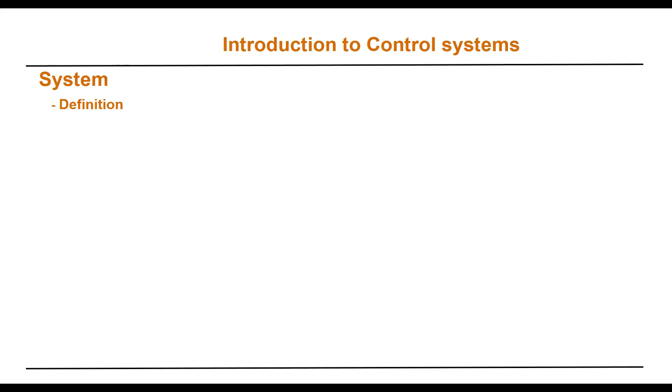Today we'll be continuing talking about the introduction for the control system, but let's start by defining what is a system. So any help? What is a system? Any suggestion? Input-output process. Input-output process. Well, a system is an interconnection of components, forming a system configuration that will provide a desired system response.

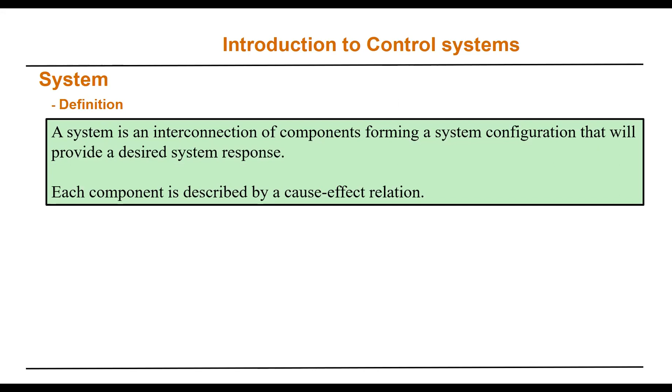Each component can be described by cause and effect. Basically, we can model the system by a black box. I have input to the black box and I get an output. The input to the black box, basically, is what I want, my desired output. The output will be the actual one.

And in here, this is the black box. This black box could be a differential equation, could be a transfer function, could be a state space representation. So basically, I am representing the system by an input-output relationship. Okay, cause and effect. Any question here?

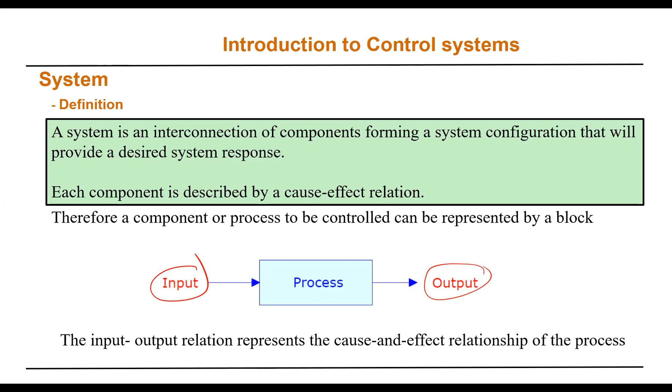Well, let's talk about an open loop system. What's an open loop system? There is no feedback. One way. Okay, basically in the open loop system, I have a process and I have desired outputs. I hope my actual output will be equal to the desired output.

But sometimes it doesn't match. In that case, I cannot do anything. I cannot do any correction. I hope my system will work perfectly, but if it doesn't, then it doesn't. Can you give me from real life any example for an open loop system? Toaster. The op-amp. In the op-amp, well, the op-amp will give you a gain, but sometimes the op-amp has a built-in feedback, you can have a built-in feedback.

Maybe in a communication system, when you receive a modulated message, and then you want the output. In the simple communication system, there is no feedback here. You just receive the modulated message, then you demodulate the message, and then you extract the output.

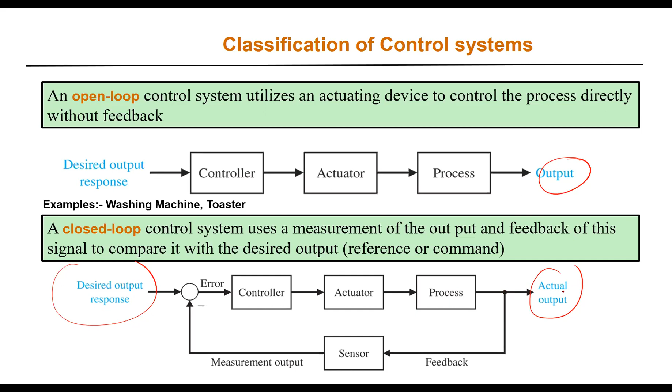If there is a difference between the actual and the desired, then the compressor will start working, and you will have more cooling in the system. If you reach the desired one, there is no error. The controller or the compressor will stop working. So in here, what you need: sensor, and comparator.

So generally speaking, we will be using feedback system. It doesn't mean that we don't use open loop system. We do use open loop system. What's the advantage of open loop system over the feedback system? Any advantage? Simpler. Simpler. What else? Cheaper. You don't need to have a sensor, but sometimes it's not accurate. So most of the time, we will be working with the closed loop system.

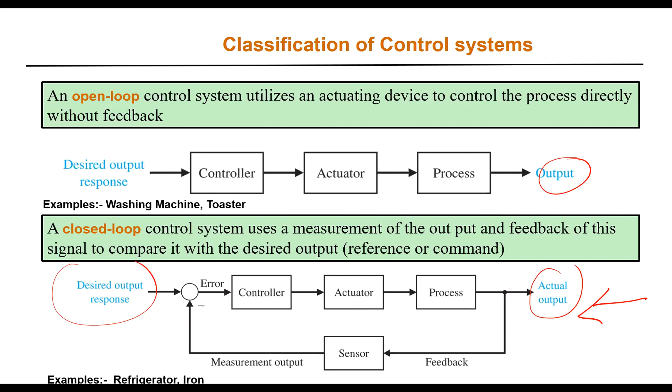You are putting an antenna in the roof. What do you want to do in the antenna? You want to position the antenna through the motor in certain direction. And suppose there is a wind in the roof. The wind tries to put a torque such that it will try to reposition your antenna. But if you have good control system and the disturbance, of course, with a reasonable power, your system tries to adjust such that the effect of the disturbance will be minimal.

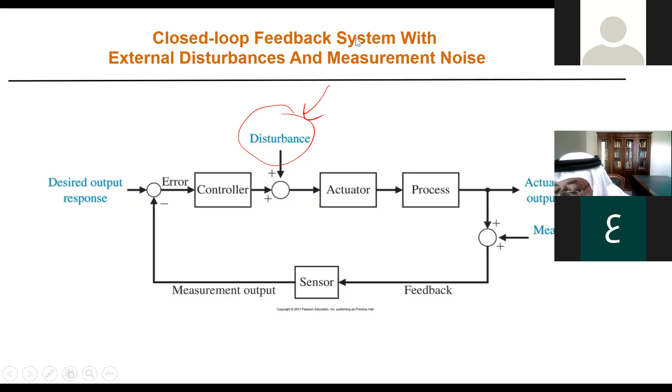Okay. Well, where this is, this is a disturbance.

Okay, the actuator, as I said, if you have water tank, the valve is the actuator. The controller is the motor. The motor will drive the actuator, okay? But most of the time, we will put the controller and the actuator together. But technically speaking, your question is absolutely correct. The actuator is either a mechanical system, which is the valve, or could be an electrical system. The controller is what it will do to the actuator. It will make the actuator be on and off, or rotate in certain direction.

So the actuator could be mechanical, and I gave you the example of the valve in a water tank. The controller, Doctor? The controller is the motor. The motor, I see now. Okay. Yes. Well, you could have. Yeah.

Doctor, a disturbance, does it have to always happen between the controller and the actuator, or can it happen in any part of the process? It could, a disturbance could be anywhere in the system. We are modeling it in this way. We are modeling the disturbance as another input in the system, we are positioning it in here. But disturbance is, you know, modeling of another input.

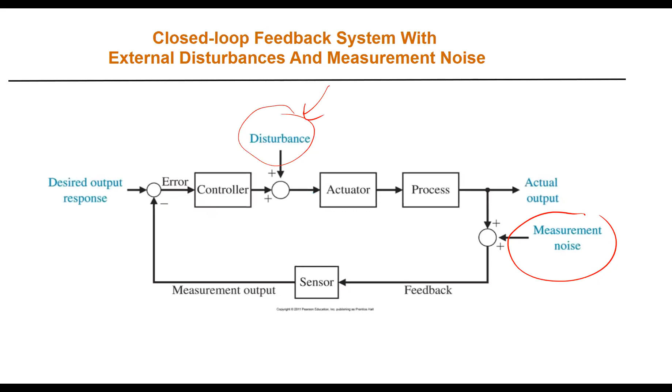Now in here, well, this is a loop. I could have more than one loop. I have an inner loop and outer loop, and each one has its function. Now in this system, tell me how many inputs I have and how many outputs. One input, one output. We can say main input, yeah.

What do I mean by input? I mean, Doctor, main input. Yeah, well, it is one input. The other one, this is inside. No, the external input, the input which will drive the system. This is an input. The internal one, this is not an input. Unless, for example, in the case of the previous one, you could think about the disturbance as another input. So if this is the case, I will call my system single input, single output. Okay.

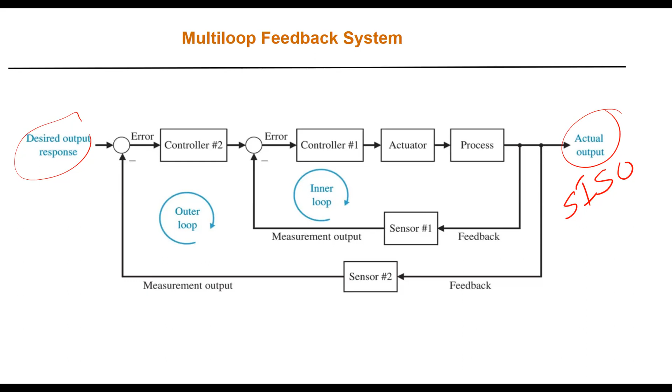This is the opposite of multi-input, multi-output, right? We could have a multi-input, multi-output system. Can you give me an example of multi-input, multi-output?

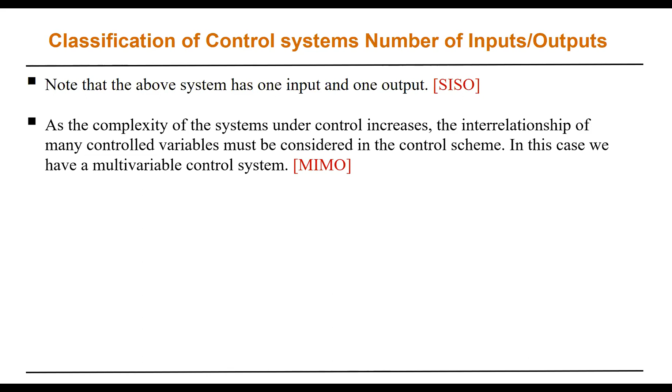But a simpler one, look at this one. How many inputs I have? 2 sources, yes, I have 2 sources. And you have outputs at each passive and active component. Yes, now the output, you define it. One output, let's say IL in here, or 2 outputs, this is VC2, and this is VC1. So in this case, I have 3 outputs and 2 inputs. This is what I mean by multi-input, multi-output.

Okay? Doctor, could you repeat the output and input in this example? Well, in this example, I have VS as input, a voltage source, and let's say IS, a current source. So I have 2 sources. Now, the output depends on what I want. I can define IL as an output, VC2 as an output, VC1 as an output. In this case, I have 3 outputs and 2 inputs. Or suppose I'm interested only in IL.

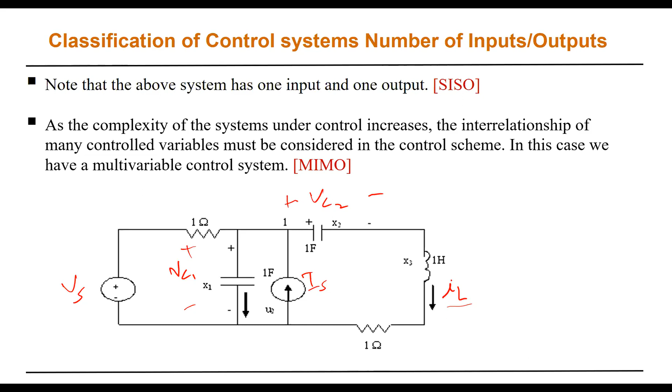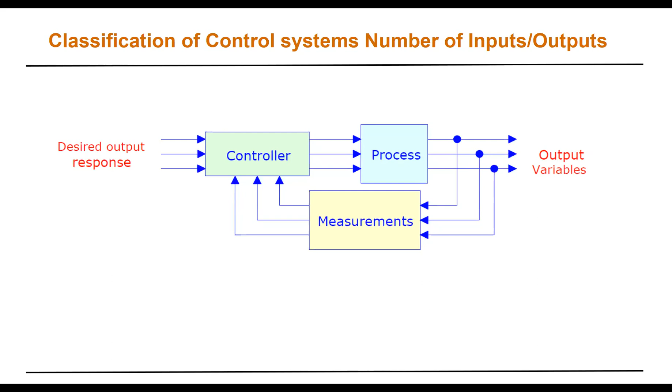Now, in general, this is the way we put them. I have a controller, and I have many inputs, measurement devices, outputs. So this is the way we view the multi-input, multi-output system.

Well, when the control system started: very early, in the ancient years, people used control systems. If you think about the pyramids, how the Egyptians built the pyramids, how did they put the huge rocks up? But theoretically speaking, or as a process, it started in 1769 with Watt's invention of the steam engine.

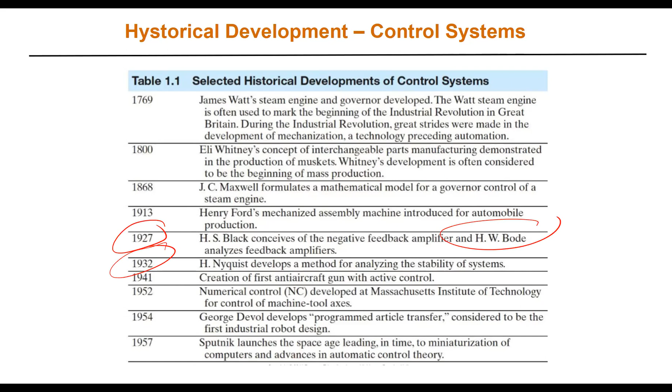Then they started systematically in the process. And then, as we move on, they started developing many things. We are still using some of the things from 1927, like Bode, and 1932, Nyquist. As a matter of fact, in this course we will be checking the stability of the system by using the Nyquist method, or we will do the Bode plot diagram based on Bode's work. Of course, as we move, things develop.

And now, these days, what is different from the old time? For example, in the 70s I studied the course; more or less the material is the same, but what's different is the computer component. For example, now we are using MATLAB. You can program the entire course through MATLAB. So the computer part is changing.

You can analyze, you can design more complicated, more complex systems than what people used to do, because the mathematical power or the computing power was very minimal. Now with the computer, with the supercomputer, we could do a lot.

Yes. I don't want to interrupt the flow, but a question comes to my mind about Nyquist, because we studied Nyquist back in 370, where we use the Nyquist criteria for sampling. The sampling frequency has to be double the frequency of the signal so that we will not miss any information, right? Yes. So is that related to the Nyquist? No.

There, the Nyquist rate is a little bit different from what we will be studying here. Here we will be studying: if I have the transfer function of a system, how can you know it's stable? Suppose I have this closed loop system. Okay, this is the transfer function, let's say. You are giving me the transfer function of the open loop system, and I would like to study the stability of the closed loop system by the Nyquist criteria.

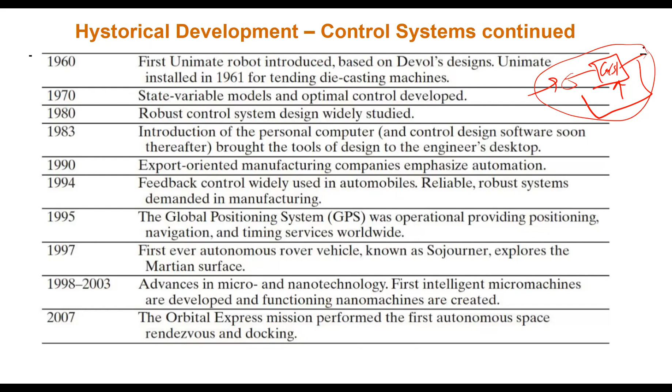No, it's a little bit different. There you are talking about the Nyquist rate. Yes, the sampling. No, here it's a little bit different. I see. Okay.

Well, let's come back to the modeling. This is an open loop system. What is my desired output here? The water level in the tank, which is basically h, the height. Yes. Okay, so the height is my desired output. At home we are using the water through V1. How do I check if I am having the desired level or not? And V2 is set, let's say, at a certain level.

How do I check if I'm having the desired level? What do we do? We put a sensor on H. No, wait. If you put a sensor, now you make it a closed loop. Now I'm talking about open loop. You are absolutely right, but you are jumping to the closed loop. But here, how do we check?

Well, every once in a while, we go and check the level. Or if you don't check, all of a sudden you'll discover you don't have water at home. Yes, you have to do it manually. So basically, every once in a while, you send somebody to check the water level. But here the accuracy is not going to be that much. If the water level is not what you want, definitely there is no precision, because you are looking at it. You don't know whether it's actually reached.

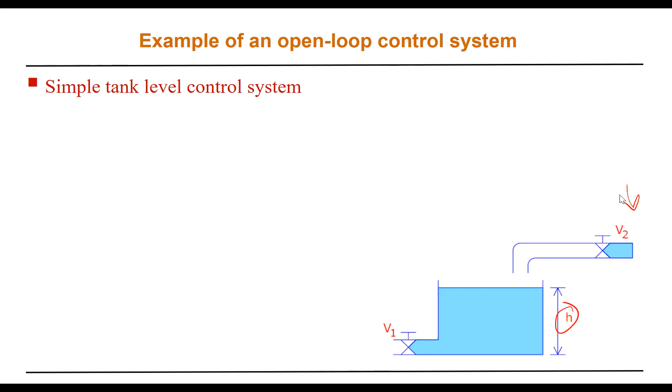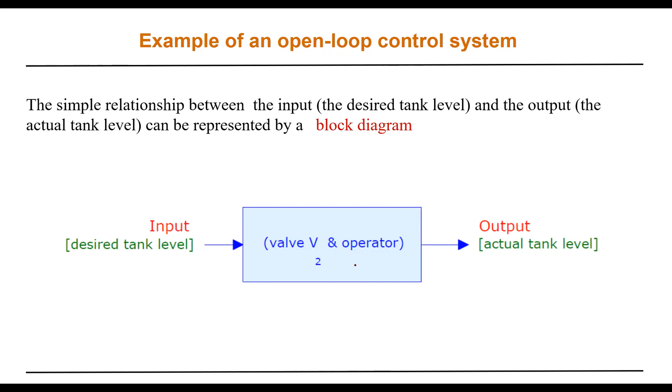So in this case, I can think about it as an open loop system, and I can model it as the following block diagram: the desired level through V2, and the operator, the person who will see, can adjust the opening of V2, and then you get the output. But as I said, in this case your system is not very accurate. If you want to make it automatic, definitely you would put a sensor.

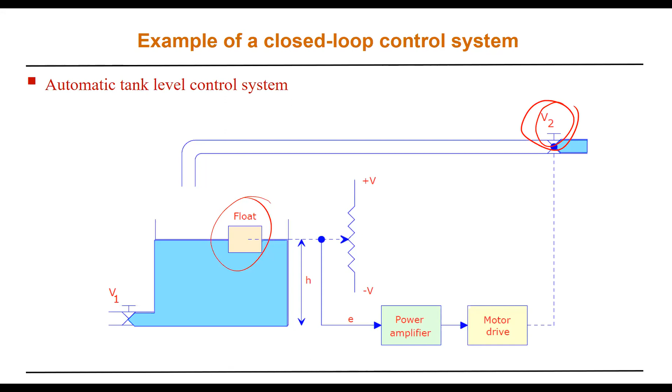Unless, of course, sometimes maintenance you have to do - sometimes the float is not working, or the sensor in the motor is not working. But generally speaking, this is basically a feedback system where I can model it this way: the desired input, the actual output, I compare the actual with the desired, then through the controller I will adjust my system. This is basically what everybody is doing at home - you have the float and the motor, and it will operate automatically.

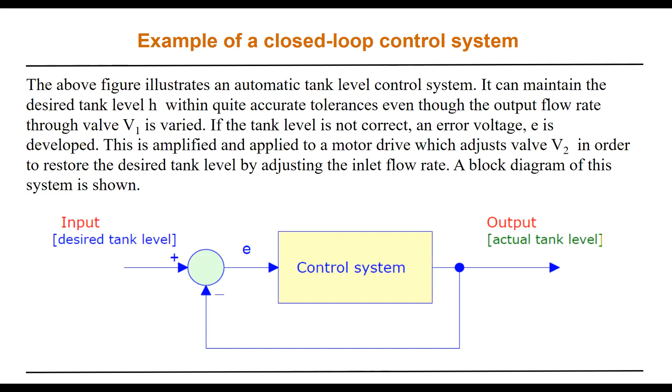Let's take another example - the steering control system. What do you want to do here? What is your desired output? Go straight - this is your desired direction, let's say. But suppose all of a sudden you have a car in front of you. What do you do? You have to brake, or if you have several lanes, you will do correction through steering, exactly.

This gives the idea of autonomous cars - yes, this is what they are going to do, the autonomous cars. I think it's full of control systems, right? Yes, but it doesn't stop - the car will not stop, because look, what's going to come will definitely be a very complicated system, but that's what they are going to do, and I think they started already.

But suppose you are driving a car, not necessarily with a car in front of you - you are on a road where there is a curve. What do you do? Do you leave the steering wheel as is, or try to bend it? You try to change, because if there is a curve in the road, you are on the highway and you want to take an exit - what do you do? You have to turn the wheel. So I'll basically show you - you have to make a signal, which most people do not do.

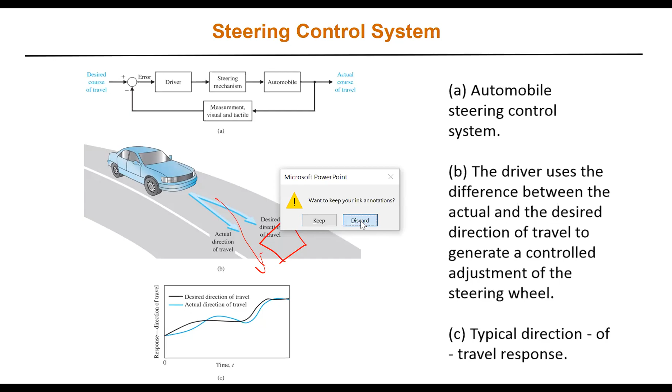No, the steering wheel will be in that case the actuator. The driver is the controller. And how do you change it? How do you change the direction? You need mechanical.

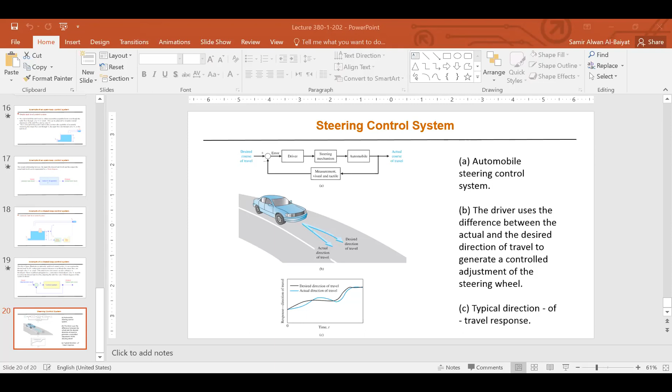Okay, it's good. Now, guys, it's very interesting and honestly this is great. But also I realize, in the online, I am a little bit slower.

Okay, so we have to move a little bit. Now, what we want to do now is basically what we are going to study: the mathematical model of systems. So in the rest of this lecture and next lecture, we will be talking about mathematical models. In order for me to do certain things, certain calculations, I need the mathematical model. The mathematical model could be a differential equation for the system, and we will be studying mechanical systems as well as electrical systems. We will talk about the transfer function of a system, and then we'll talk about MATLAB.

How many of you are familiar with MATLAB? Well, I hope all of you are, but if you are not, I think in the first experiment you will start learning the MATLAB commands. As we move through the semester, I will give some commands and give you homework, usually containing problems that use MATLAB. In the project, inshallah, you'll definitely be using MATLAB heavily.

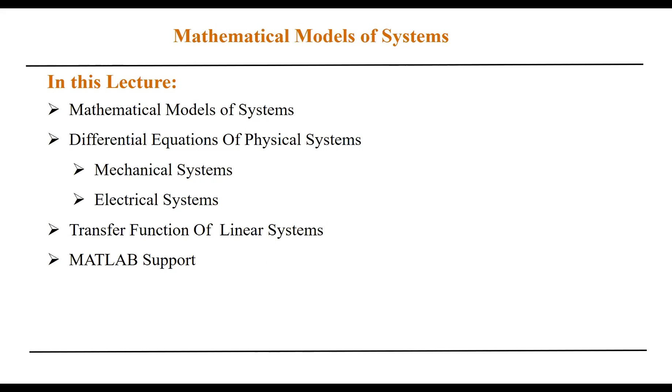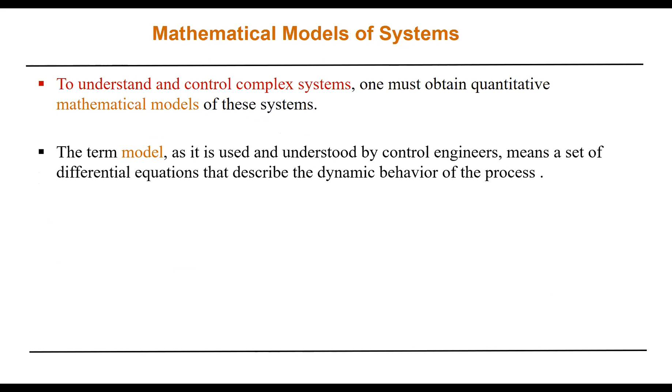So let me start with the mathematical model. What's the model? Okay, if I want to obtain a quantitative description for the system, I must have a certain mathematical model. So the mathematical model usually is a differential equation. It could be our starting point most of the time. It will give you the behavior of the system and how you build this system.

Well, usually if you have a physical system, you will use physical laws. So if you are talking about a circuit, if you are talking about electrical engineering, what do we use? What are the laws we use in describing, let's say, a circuit? What do we use? Ohm's law, we use KVL and KCL. Ohm's law is part of, within, KVL and KCL. How about if I have a mechanical system? Newton's law. Newton's law, okay.

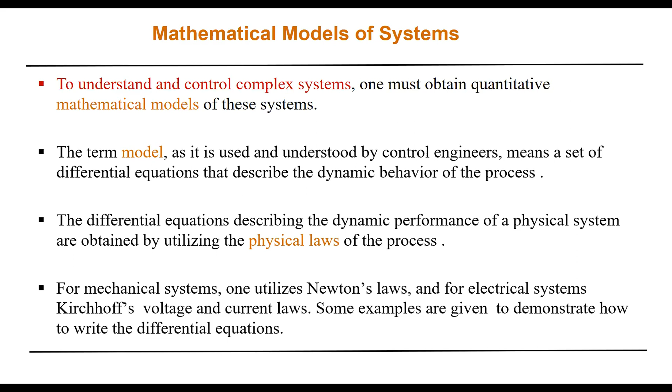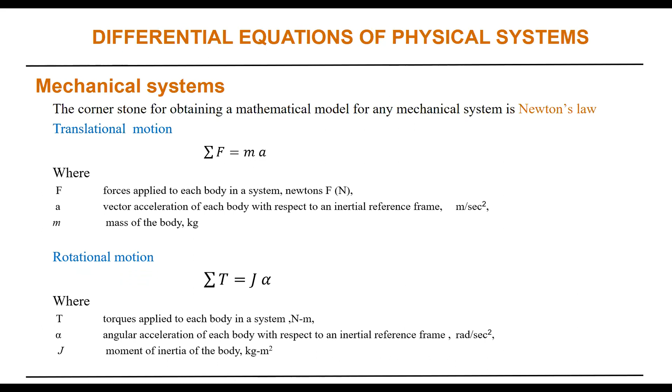So basically, if you have a physical system, we are going to start with some simple physical systems, and then we will be using both Newton's law and, as I said, KVL and KCL. Now, suppose I have a mechanical system. What's Newton's law? Basically, if you have a system, the summation of the forces must be equal to mass times the acceleration. So if you have a free body diagram, you will look into the forces acting on the system, and the summation of those forces must equal the mass times acceleration. So basically, when you put a force, you are moving the system. This is in linear motion. What will happen if I have rotational motion? Torque. So in rotational motion, the summation of the torques must be equal to the moment of inertia times the angular acceleration.

Go to the car. Where is this in the car? Suspension system. Exactly, the suspension system. Where do you sit? You want to sit comfortably in the car.

So you are sitting down on a spring. There's a spring and also a shock absorber. If you are moving on a straight smooth road, you feel comfortable. But if there's a bump in the road, the shock absorber and the spring will absorb this shock, and you don't feel that much.

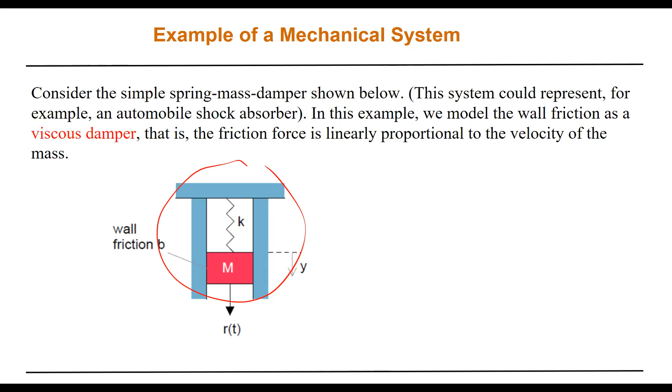Newton's law, right? The mass, the force, balance. Suppose I have the mass, free body diagram. This is the mass. What are the forces acting on it?

We have the source force, which is r of t, the input. Gravity. What else? And the spring force - the spring will try to pull it up, and the friction. The force in the spring will be proportional.

Suppose this is my y, this is the distance I'm moving downward. And look, I'm not going to consider the gravity here. Why? Because I'm assuming I have the mass before I put my force. The mass, hanging in a spring, will reach a certain equilibrium point because of gravity. I will assume I am at the equilibrium point and measure from that point, so I don't have to worry about the gravity.

So basically in a neat format, let me erase what I put here. So I have this, the force, the motion from this point, this is the force due to the spring, and this is the friction.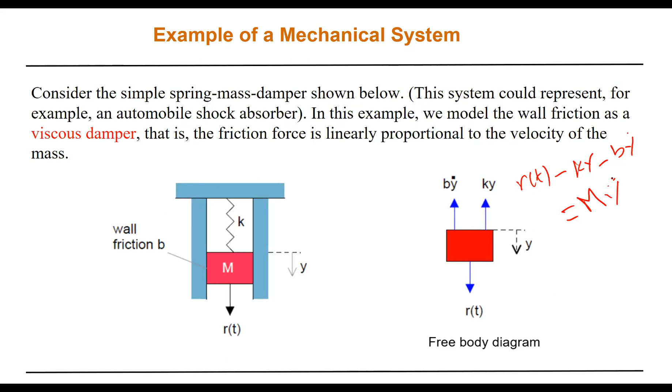Now, what is Newton's law here? So what do we have? R of T minus KY minus BY dot equal to the mass times the acceleration. What's the acceleration in terms of y? Y double prime, Y double dot.

So this is basically Newton's law for the system, and this is what I'm saying. Put it neatly, so this is what you have - the differential equation which describes the second order system. What is the order of the system here? Second order. Okay, so this is basically a mathematical model.

Let me go quickly to another example. Suppose I have this example, this is a circuit. Suppose my output is V and my input is R, a current source.

How do I write the differential equation for the system? KCL. With KCL, what is the current here? The total V over R current.

So the current here is V over R, plus what's the current here? C dV by dt. Plus what is the current in the 1 over L, the integral of V dt. This must be equal to the r of t - the summation of the current going out equal to the summation of current moving in.

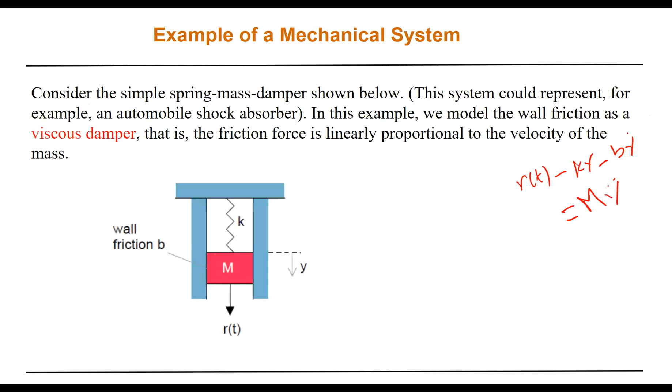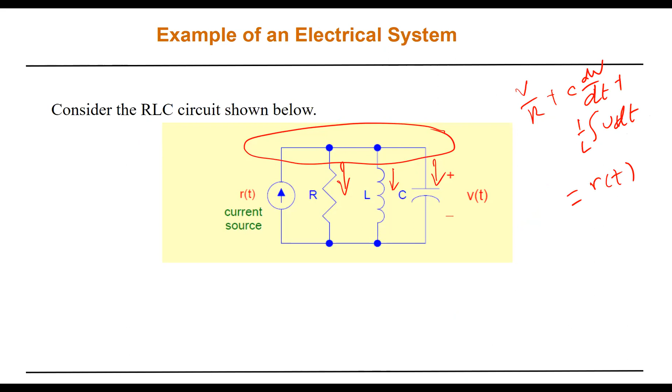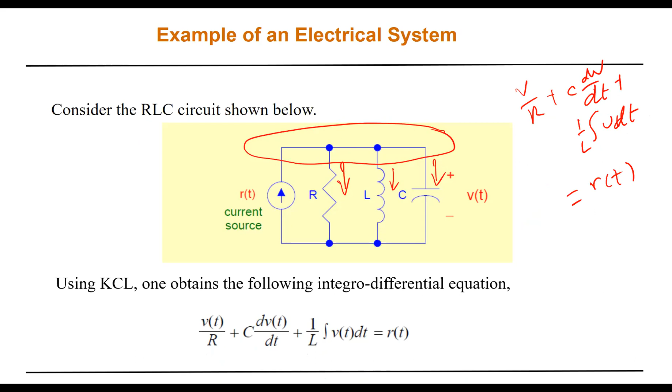Any question here? In the previous example, we have a couple of minutes - any question? Okay, so the other example, as I said, those are the two examples we will be using, we will build on this knowledge when we move further. We could later on talk about a little bit more complicated system, which is the DC motor or DC generator. But I think we'll be stopping at this point. If there is a question, I would be more than happy to answer it.

Doctor, I have a question. One minute, I will be with you. Yes.